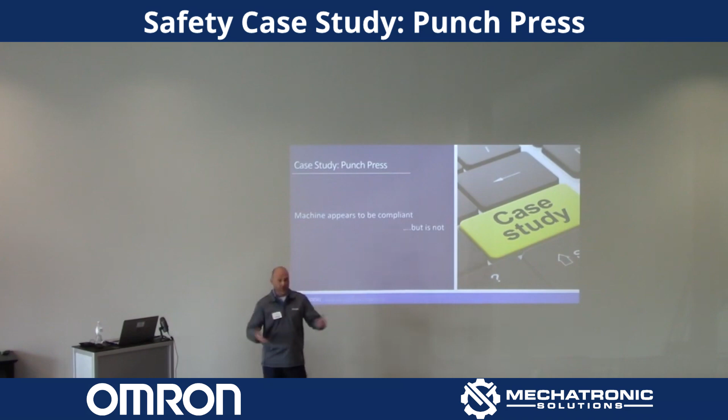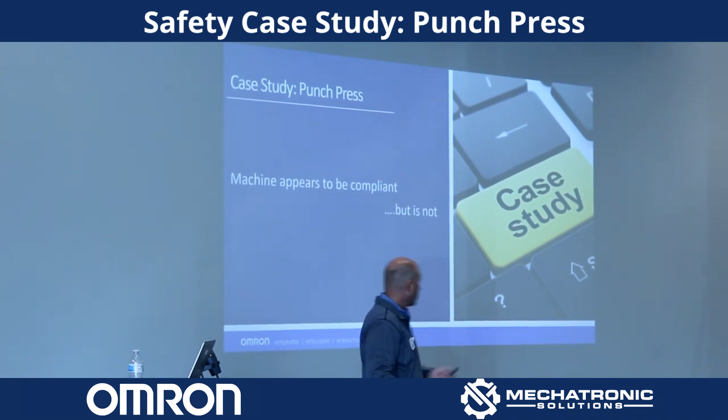And the guy at the facility starts going through the report and is just like, wow, there's a lot of information here. Okay, well, let's just randomly pick a few machines so I can get a feel for what's in this report. He opens up the page and he looks at one particular machine and he says, okay, let's dive into this one. Let me see what you found. And it happened to be this particular machine right here. Just random luck, right?

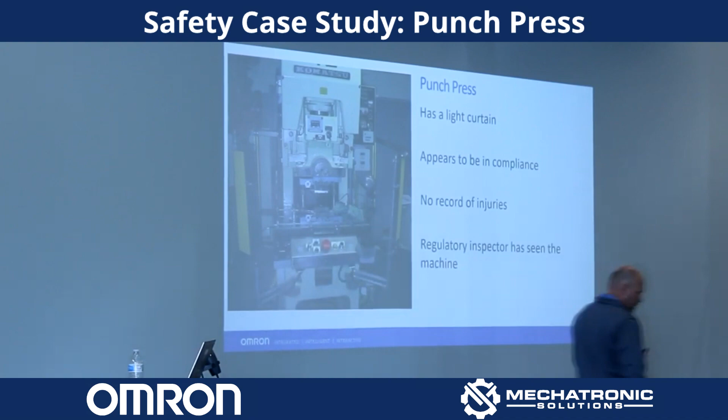And what he found startled him. He's like, hold on. What do you guys say? You're saying that we have to do stuff to this machine? This is one of our better guarded machines in our facility. I don't think you guys know what you're talking about.

And before he really gave us a chance to explain, what's a polite way of saying you got kicked out? We got asked, I don't know. There was a conflict in the schedule and we were asked to leave. Let's put it that way, okay?

So, all I know is I get a phone call a couple days later from a gentleman at headquarters in Pittsburgh who says, hey, we need to talk because I've got a plant that's saying you guys are ripping people off. And y'all need to come in here and sit down and we're going to discuss this. So, hop on a plane to Pittsburgh. We sit down in the guy's office, and these are the slides that I put together for that particular gentleman for this company.

So, we had a machine, a little press here. It has a light curtain on it. This is the light curtain right here. Here's the mirrors that go across the front. So you got a transmitter, mirror, receiver. 3-sided guarding. It's got a light curtain on it. It appears to be in compliance. No one's ever been hurt on that machine that they know of.

And they had a compliance officer come through the building. Now, they weren't specifically looking at this press, but they'd already had a compliance officer in the building, which is the reason we were there doing risk assessments on all their machines. But that's part of it. So, like, hey, I'm not sure you guys know what you're talking about. I'm not sure we should pay the bill for this assessment.

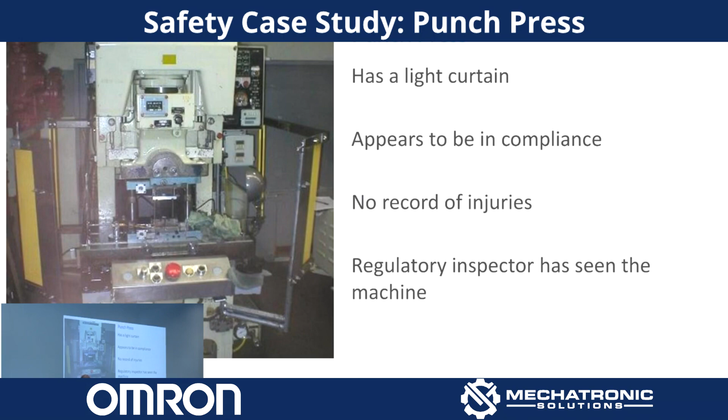Okay. So I sit down at corporate and say, okay, well, here's what we found. Walk me through it. Your light curtains, they're type 2, not type 4. What's the difference? Well, a type 4 light curtain is designed for safety applications. Type 2 is not. Whole different circuitry, no cross-checking, redundancy internal. One's built for safety, one's not.

The light curtains are mounted too close to the point of operation. Well, where do they need to be mounted? Well, that has to be determined by a stop time measurement. So based on the stopping time of the machine, we have to adjust those light curtains back to a safe distance so that if somebody breaches the light curtain, the press can come to a stop before they can reach the hazard zone. Oh, that's required? It sure is.

Operators can reach around the light curtain into the point of operation. So let me back up for just a second. Well, actually, you can kind of see it. On this side here, you've got a control cabinet. Over here, you can reach between the frame of the machine and the light curtain. Well, who would do that? Remember one of those early slides I showed you? We train our people not to put their hands into the machine, right? So you can reach right around the light curtain into the point of operation.

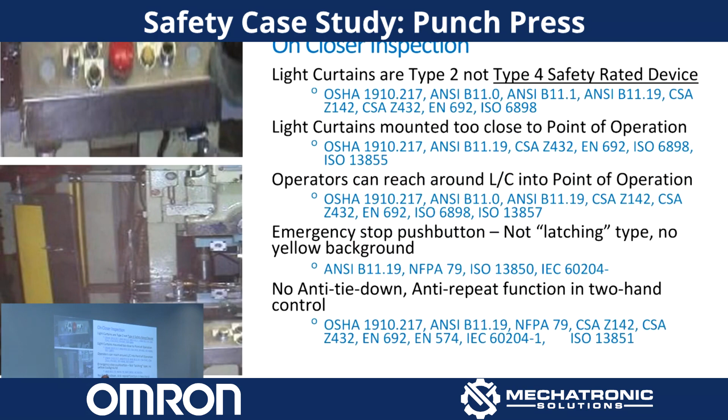Well, only an idiot would do that. And we never hire idiots, so we're in good shape, right? Right? Okay. The emergency stop button, it wasn't the proper type. We'll talk about that in just a bit. Well, I'll show you an example.

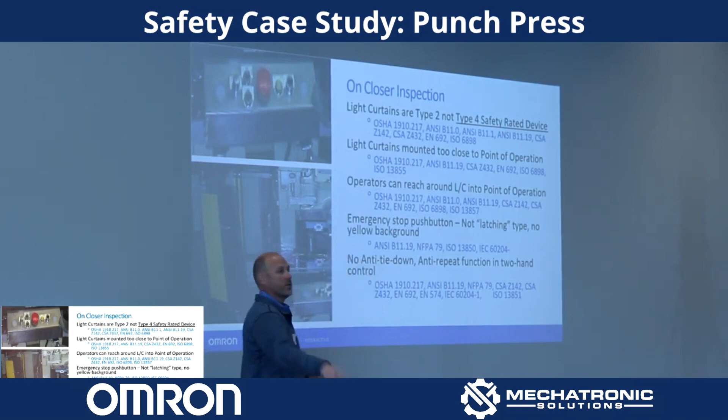No anti-tie down on the 2-hand controls. So 2-hand controls, hit 2 buttons, that causes the machine to cycle. If I hit both of them and I keep one held down, that machine will just sit there and cycle. Well, that's not good. What if I tie a rope, or what if I ball up a rag and I put a piece of tape around it and I put it on one button and I just turn it into a single push button operation? Okay, so that's not compliant.

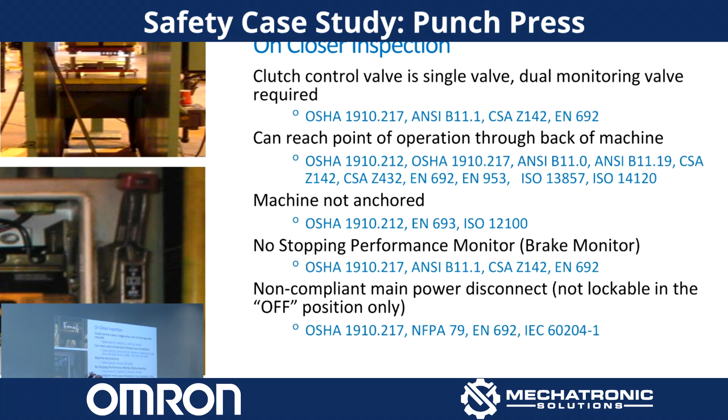So we found that. Okay, clutch control valve, reach through the back side of the machine. Now I didn't have photos of every angle of the machine, so this is a different machine here, the green. But you could reach right through the back of the machine. The machine was not anchored. It didn't have a stopping performance monitor. That is unique to mechanical presses, but they do have to have a stopping performance monitor. Non-compliant disconnect.

Inside the control. We haven't even touched the controls yet, right? Inside the cabinet. Light curtain tied into a stop circuit on the machine control, not redundant, not monitored, and not control reliable. Well, that's kind of a legacy term that not a lot of people use anymore. Anybody heard that term, control reliable? Yep, okay. So that's a term from the ANSI world, from the OSHA world, and now we're talking about performance levels when it comes to machine controls. But the idea is that machine control is not compliant. So we tied our light curtain into the machine control, and we could have a simple relay failure lead to a complete loss of safety.

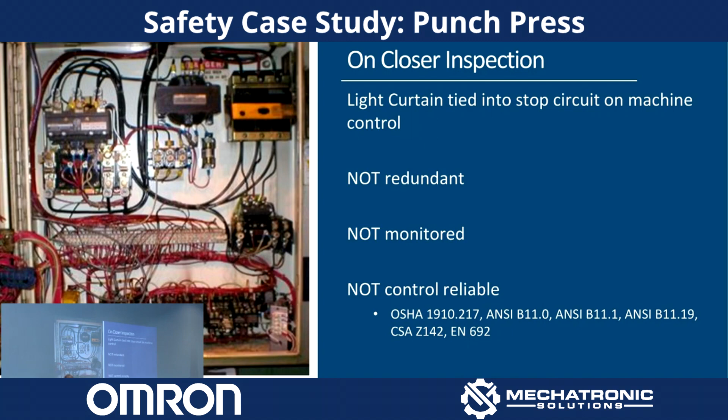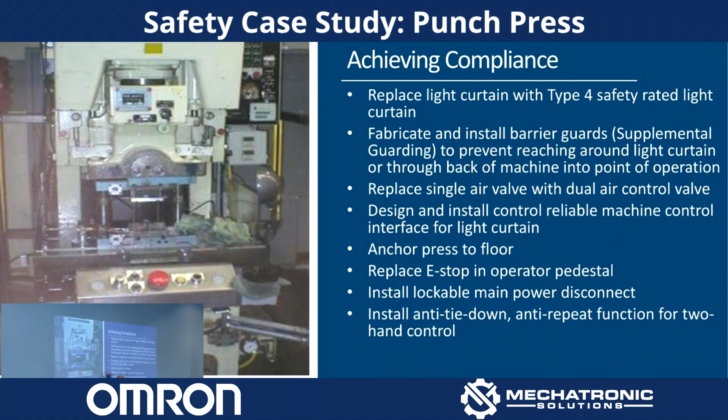Okay? So how do we achieve compliance? Well, we had to do a whole bunch of stuff, right? We had to replace the light curtain, fabricate some guards, add some, it's just a whole list. So here's the deal. I told you I had to hop on a plane on short notice, get out to Pittsburgh, sit down in this gentleman's office. I laid all this out for him. These are the slides I used. Jim, you guys know what you're doing. Please continue. I'll have a word with the folks at the plant. You're free to proceed. And we went on and we did a lot of business with that organization.

But the point is that they were walking past that machine, and so did the compliance officer, and they never saw anything that made them think that there was a problem, and no one had been injured on the machine. And yet when you dive right into it, you find a lot of different things. Hey, these things are not compliant, and here's why. So it's good to understand the safety. Do we need to go to this extent on every machine? I think so. I do. I think that's the extent that we need to go through. We need to make sure that every machine.

If you're building new equipment, we should absolutely make sure that every new piece of equipment is fully compliant. I like to tell my customers, look, let's draw a line in the sand. And let's say that no new equipment is allowed to enter this building unless it's completely compliant. Now we have this legacy, so everything new will be compliant. And we've got an agreement on that. We'll write that into our purchase order agreements. It has some boilerplate language that says this machine shall be compliant with applicable standards upon arrival. If not, we're not paying the bill, however you want to write it. So you draw a line in the sand and say no more new equipment coming in the door unless it's compliant. And then, what do we do with this existing aging population of equipment?

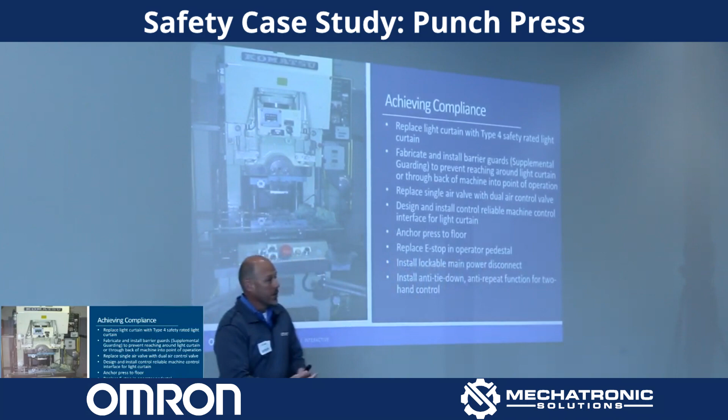Well, that's where you got to do your risk assessment and determine, all right, let's prioritize. If we have whole body access, if we have amputation potential, if we have fatality potential, maybe that's where we get started. But somehow you got to get a game plan together that says this is how we're going to address that existing population of equipment, and that's going to take us a year, or that's going to take us 5 years, or somewhere in between. But you put an action plan together. All right? Okay.